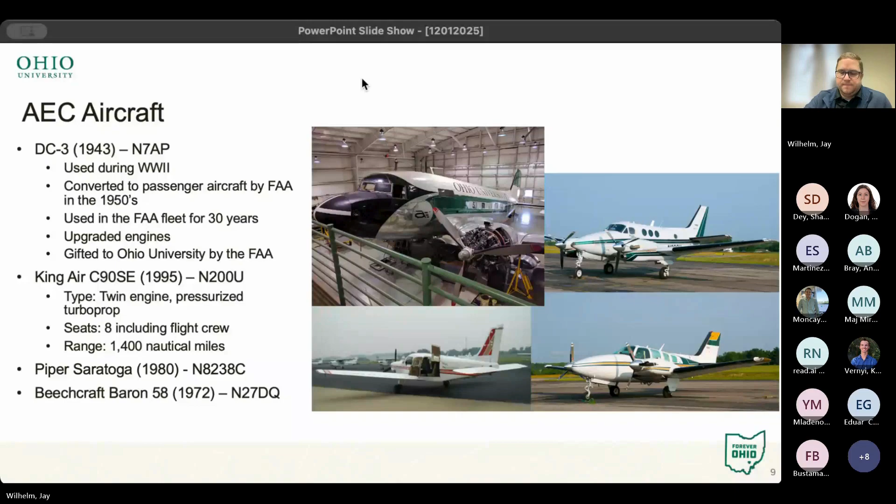Just a couple of good projects to try and boast about the center. That NASA project, I'll go into some detail about that in a minute.

I talked about the VOR DME program. There's a joint university program that's been sponsored by the FAA for 50 years now. It's in collaboration with MIT right now. There's only 2 universities, but Princeton used to be involved. I can't really point at another small university that has a 50-year-old program where we compete with MIT. So we're bumping heads with them with various different tasks that come down from that program to train graduate students.

So they have a really good time with that, and those students have won a lot of awards. The CubeSat went up in 2020. That was a good one to really look at GNSS data. There are receiver networks across the world, but now we have one on top of our engineering building that was receiving data just from that. And the PI on that, I think, is planning to do another payload.

Then there's a low altitude weather monitoring project that went on a couple years ago that was funded by the state. This was to make an inexpensive little weather monitoring box that could tell you cloud coverage, temperature, wind speeds, and a bunch of other things for less than 400 feet, specifically for drones and AAM.

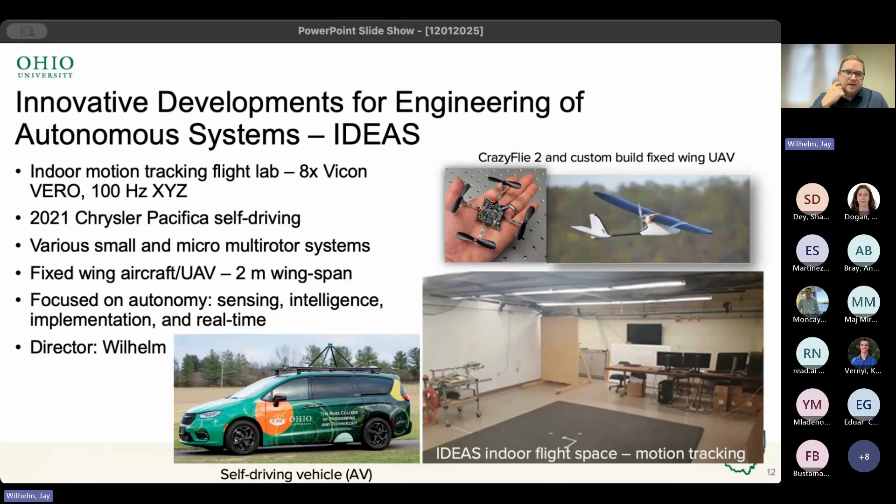We have, I think, 5 P100s and 2 P300s from JetCat. We're part of an Air Force project where every year they give us different requirements for a capstone experimental design process. The students have to do a bunch of research on how to do the modifications, what they need to design around, and then they modify the engine and test it. So far we've been taking it outside and running it.

So real quick, I talked about our automated driving project a little bit earlier. In 2019, I think we started collaborating with the Ohio DOT and the US DOT about what it would take to drive in Appalachia of Southeast Ohio. I pulled these three routes up right here, and they're a very hilly region. It's very up and down and very windy, and probably the most difficult place we could think to drive an autonomous vehicle. We think about big cities and people everywhere, but that has been nailed down pretty well.

Going to a rural environment is a little more challenging. So I used that self-driving van that I acquired to get moving on this project, and we brought in the Transportation Research Center as well. That's up in Marysville, Ohio, which is west of Columbus, and that's a test track that was made for Honda, and has since gone to a private company that they call TRC. So we did some controlled testing there, where we set up scenarios, and they had vehicles that they were driving, and then we brought it down to Southeast Ohio, and picked these three routes, had them mapped, and drove.

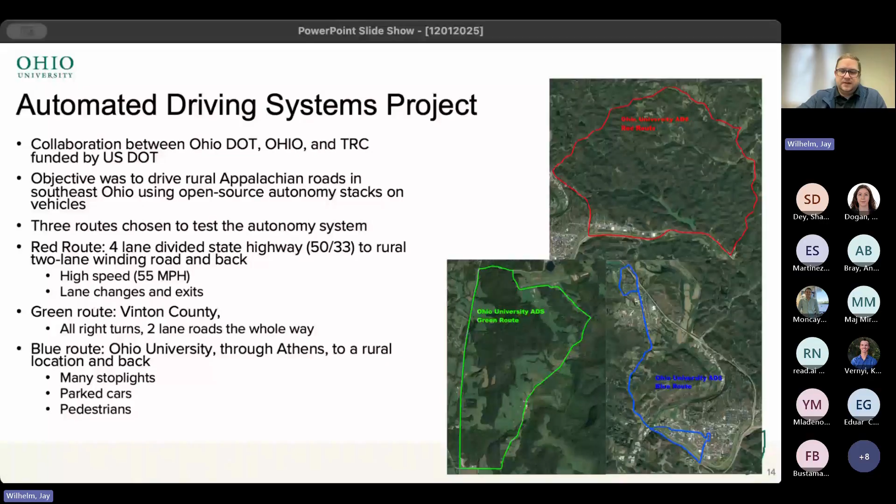So we can get 1 to 2 centimeters of accuracy, and we need that to make sure we're driving on the road correctly. For the most part, these systems use the GPS, not the line striping, to stay in the lane. You need to know where you are anyway, so they pushed it to work with GPS mainly.

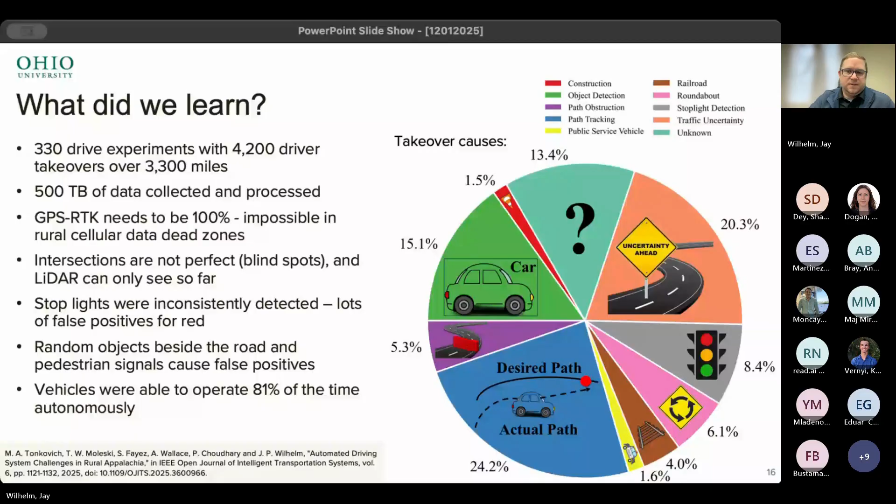So I'll move on now to what I call PRACAS. This is one of our collision avoidance algorithms that we came up with. I had a really good time with this one because most of the work was done in March and April of 2020. That's when our project was going on, and that's the time that was set aside to really make the developments and define the requirements for this.

But the world was kind of shut down during that time period, so I was able to do a lot of coding and dig pretty deep into this. There's not much else to do. So we were looking at how do you provide a collision avoidance system that takes over control of a fully autonomous UAS, with no pilot interaction whatsoever.

If you look back to manned systems, TCAS is required in all passenger aircraft over, I think, 20 passengers or something in the plane. This requires these airplanes to communicate with each other, to share their positions, and a tau value is calculated based on the trajectory of the aircraft, how long until a time to impact occurs. Then there's a heuristic set of rules: if the tau value is this, and the path is going a certain way, you need to climb, turn left, descend, or whatever. It's been very successful where aircraft actually have it fully installed. Lots of collisions have been avoided over the years.

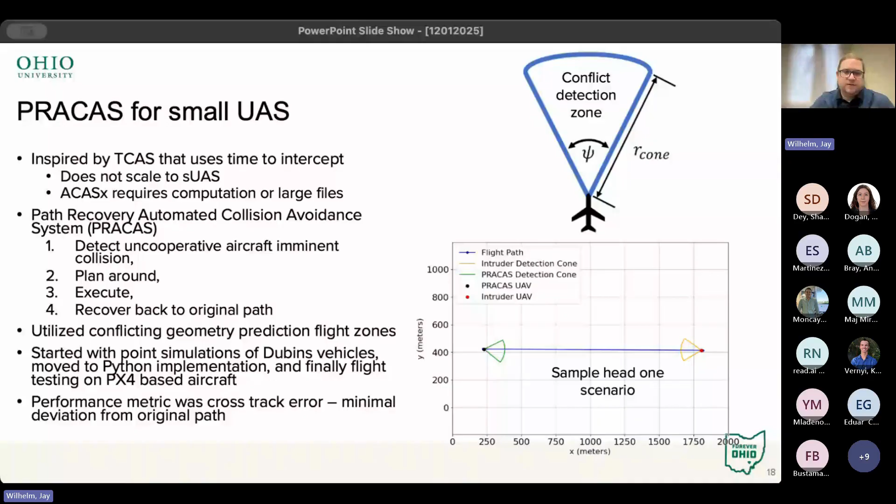They hit that point where those cones touch, and then our aircraft on the left does a plan around it. The plan part's fairly simple. In this case, there's no other keep out zones or things we can't touch. We take the geometry of the world and convert it to an A-star grid. The only keep out zone is that red triangle on the right. Each of those black dots is a possible place you can go in the grid to segment the waypoints a little bit. In this case, we are slightly higher in one direction than the other, and the system chooses to turn left to get away from that plane.

There's the impossible case where the planes are perfectly heading at each other, which sometimes produces a singularity and they don't go around, or randomness comes into play for which way you're going to turn. That never actually happens in reality—you never have two aircraft perfectly flying at each other. So we always offset them a teeny tiny bit.

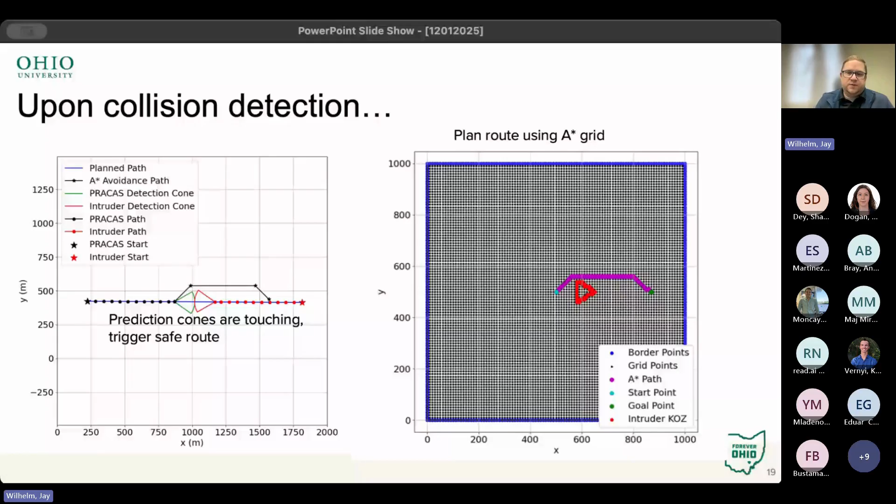So this is the first step or second step. First step detect, second step plan around. Then, once we're clear of the conflict—meaning our cones are no longer touching at all, or if we turn back to our original path we're not going to intercept that cone—we do the path recovery part. This is where I spent most of my time, trying to figure out the most efficient way to get back on our path.

I wanted to use clothoids so we could take into account the position we return to, but also be pointed in a very specific heading, which is along the path. So for sure, we could choose the shortest point and turn into the path, but that doesn't always guarantee that when we intercept the path we're pointing in the right direction. So clothoids work great with that.

The problem is clothoids don't always respect our turning radius capabilities. Sometimes it'll choose a path for us that we can't actually fly. So I went through a whole optimization process to iteratively search the space. That was really the challenging part of this.

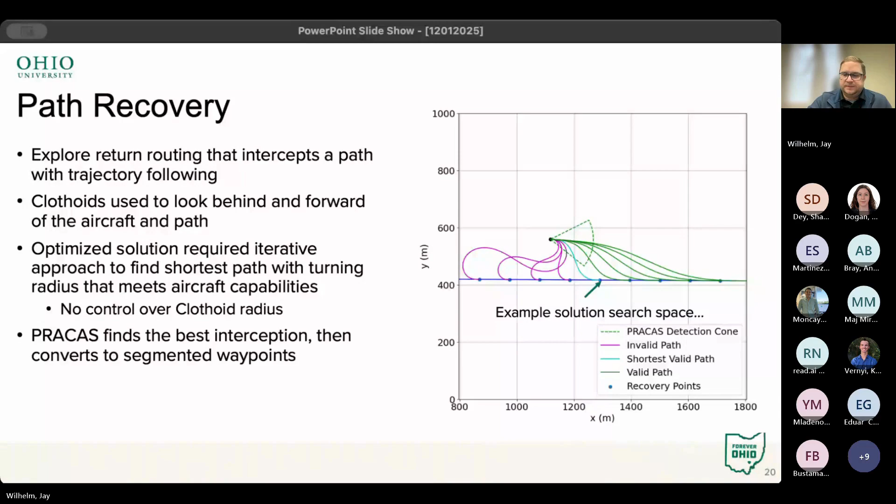Through that process, we were looking at the head-on case. Well, what happens if you're perpendicular? It turns out this works really great for, let's say, 60 degrees looking ahead. But if you get to the perpendicular case, which is the worst one, our method tended to turn in front of the aircraft. I don't think they were ever going to collide, but turning in front of someone is terrifying, and nobody would ever agree to do that. So we wanted to turn behind the aircraft instead.

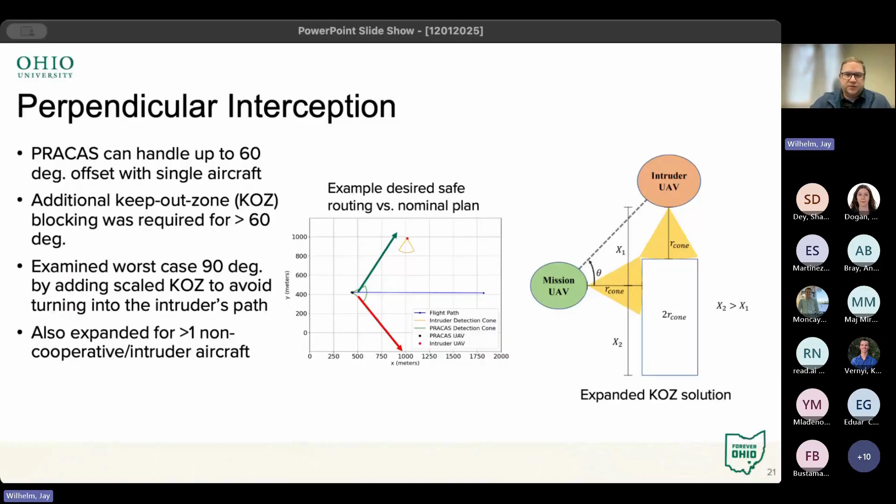So we looked at how to scale another keep out zone. When our cones touch, we basically extend the intruder uncooperative aircraft's cone down the path. So when A-Star plans, it's looking for the shortest path—it doesn't hit that cone, it goes around it. I had a student work through all the details of this and write a nice paper about it, but it was another situation for practice, just to make it better and more usable.

Here I got a nice video I created pretty early on of our system running. Say we wanted to run this racetrack pattern, and we've got these three systems in the way—it's going to automatically take over and turn back in. This aircraft had a pretty wide turning radius; that racetrack pattern is about the maximum turning radius it can do, or the best it can do. I think it intercepts these aircraft three or four times, just because you've got two going across your path, and one of them is really pesky and annoying, turning directly into you.

So I ran simulations like this for quite a while, in a bunch of different cases, to explore how well it works. Really, we're trying to measure the cross track error and the time spent off of the desired track. Because if you think about it, TCAS is only going to mess with your heading, whereas this one gets you back on your track as soon as possible.

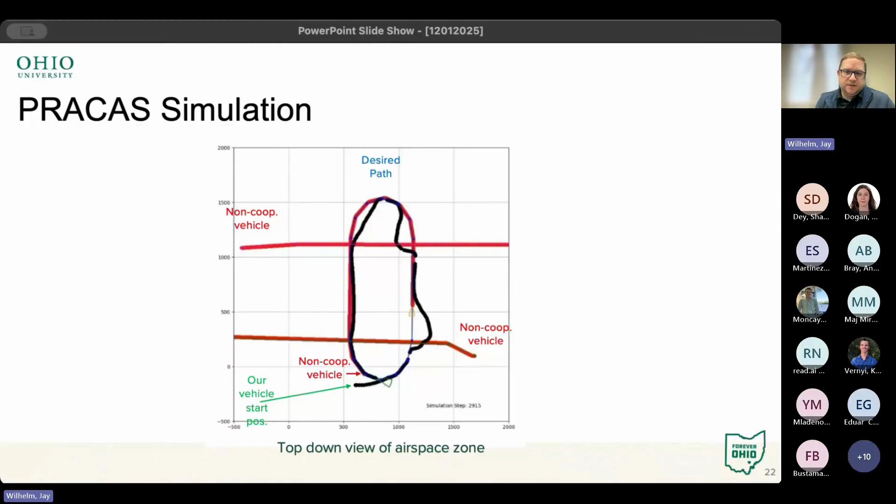So I think that's it. I have tons and tons of videos like that. After about a year and a half of doing development work and simulations, we took it out and flight tested it.

I was working with a company in Columbus that makes this autopilot. They call it Ironclad, which is based on PX4, and it's an embedded Linux system they call Ironclad because it's secure. By default, PX4 doesn't encrypt anything coming or going data-wise, so they needed more computation to be able to pull that off, plus some other safety things and verification on commands.

We were able to squeeze our software, written completely in Python, into a Docker container running on this tiny embedded computer system, and monitor an ADS-B feed of other vehicles. We had a connection to the PX4. They have a ground station, they upload the plan to the PX4, and start executing it. Our system runs in the background, able to take command of the PX4 and automatically upload the waypoints. They let me do this, which is bizarre. Then with no human intervention, it uploads the waypoints and tells it to start executing.

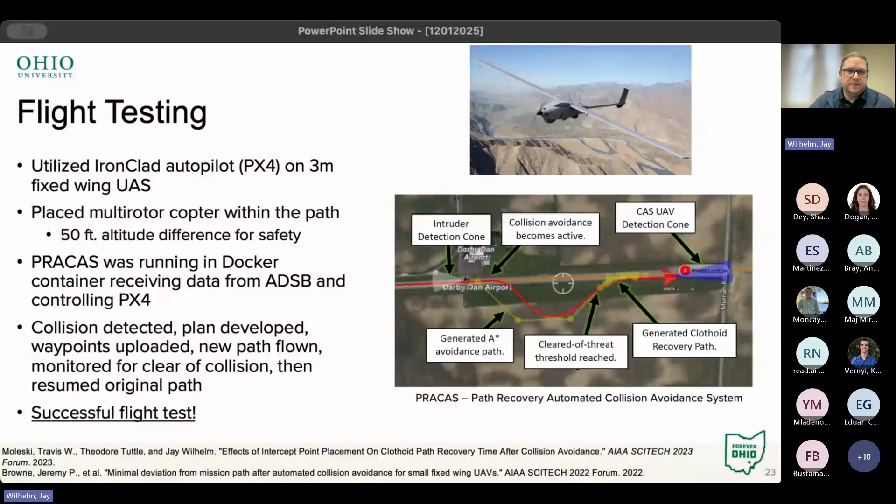Then a year and a half ago, we wrote a proposal for the NASA ULI, just like Dr. Moncayo did. We were working with a company called Reliable Robotics out of Mountain View. We have a contact who is one of our graduates, got an EE degree here, and was part of the Avionics Center. He's working on the positioning systems for their pilotless aircraft.

I show this Cessna Caravan here, a very strange picture. The engine's running, it's on the runway right there, but there's no people on board. They've done a bunch of flight tests where they've taken off, landed, flown in between, of course with no pilot or any human interaction.

It's completely autonomous. But they came to us with a problem of ground navigation precision and trust of your position calculation on the ground. It turns out that maybe the ground is not the most reliable positioning system for aircraft. Once you get up in the air, it's perfectly fine. So they had a problem where they were not trusting their GPS feeds enough to navigate the taxiways. Right now, somebody has to manually use a control thing to move that aircraft to the actual runway. Once it's on the runway, it's great. In the air, it's great. Landing's great. But then they need somebody to take over and taxi it back. So they thought this is the next logical step of where to go.

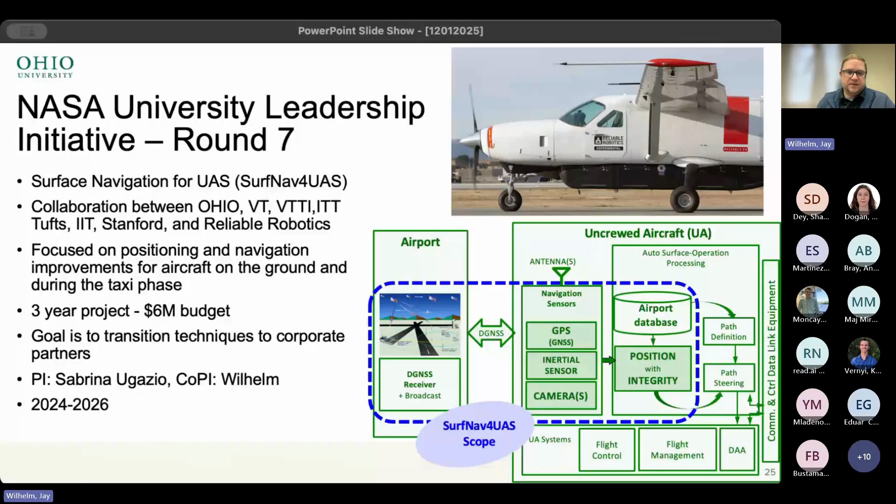I'm not the PI on it, luckily—that's a lot of management stuff involved. But my colleague Sabrina here is, and we're working with Virginia Tech Transportation Institute, Illinois Institute of Technology, Tufts, Stanford, and of course Reliable Robotics is in there.

So we do some work with computer vision, building out a way of looking at features, or contrasts of the image feed, and evaluating which of those detected features are real, should be used, should not be used. Then we look at each subsequent frame and the vectors between them, and we can get odometry based on that. It will give us an incremental position calculation. These are very mature algorithms that mostly work, but they don't always provide us information about how much you can trust the solution.

Even I'm guilty of this, of developing these systems, focusing a lot on how accurate it was, but not how trustworthy it can be. Those two things don't necessarily go hand in hand.

So we're popping the lid open on some CV systems and looking at extracting data from their processes to look at trust. Then we mess with the images—we make parts of them blurry, and purposely obstruct things to try and mess with that feature detection.

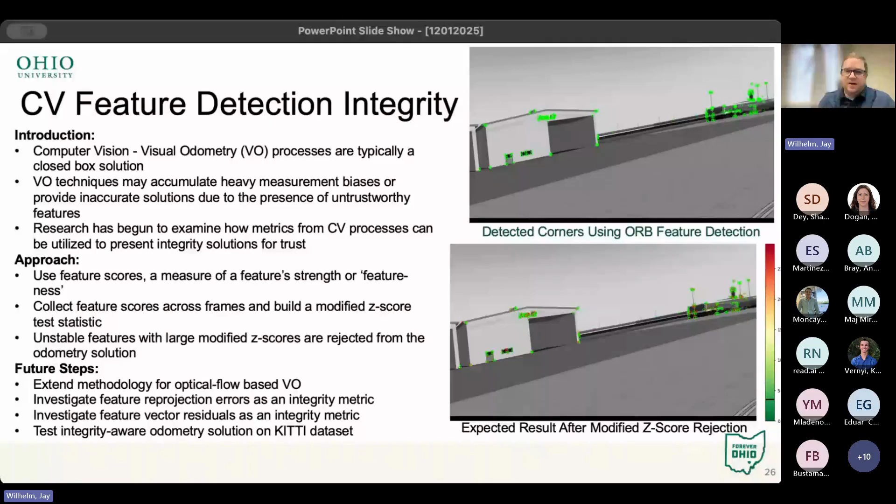So that's one of the parts of the ULI. The other one is this camera plus LiDAR hybrid localization. About 5 years ago...

We're messing with LiDAR systems. We have cameras everywhere, but we're using them separately, and so I wanted to combine them for a single localization solution. So what we did was place a bunch of landmarks in a room, and we know their position using my motion capture system—I can use that for truth reference. But we identify those landmarks visually using a camera, then we range to them with the LiDAR, and correlate the two together. Then, using the known landmark locations, I can use trilateration to find my location.

This is sort of similar to how GPS works. GPS is really using what's called multilateration, which is range to the satellites that's modified based on the atmosphere and relativity. The receivers know where the satellites are, but they're trying to calculate where you are, and it's really the intersection of a bunch of spheres. So we use a numerical solver to do that, and we do that with trilateration as well.

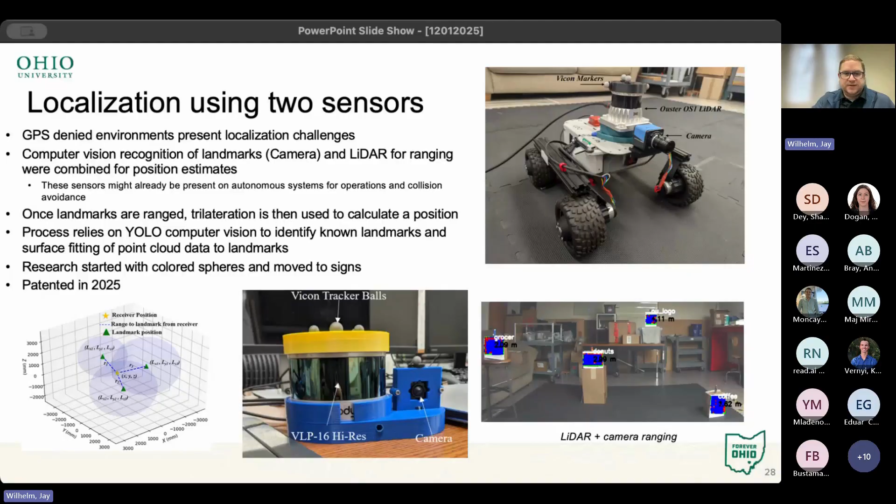I thought it was unique in the internal processes we were using, so we put forth an invention disclosure and just got the patent this year. So that, to me, that's a good thing. And of course, there's a bunch of papers, and I've got the references at the end of this.

But how we started was simulating it in a program called AirSim that Microsoft makes. It's basically like a simulation environment for engineers that sits on top of the Unreal Engine, so we can move stuff around, know the positions of things, change stuff, and work with things like meters instead of whatever the heck Unreal uses for their distances.

There's gravity involved and all this cool stuff in there, but we're able to simulate a LiDAR real easy. So we placed our landmarks as colored spheres and fed the camera view into our system, combined the LiDAR data with that, because we calibrate our cameras. We have a projection matrix, and then do our calculations. So we're like, if we're looking forward, can we see these things, and then figure out where we are? And it worked, and it gave us centimeter level error.

And then we built it with an actual camera and a LiDAR. We tagged everything with the motion capture system, so we know exactly where it is. We used color spheres because that was a super simple computer vision process to categorize it by color.

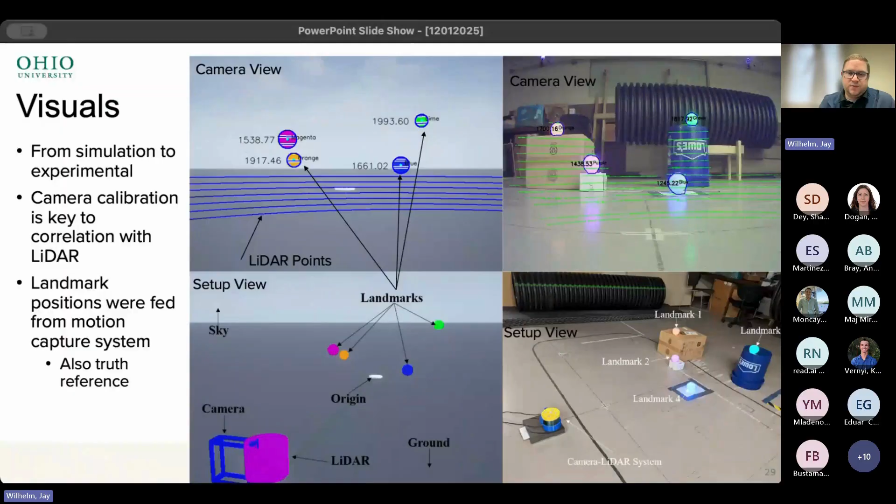It turns out that we're looking at this thing with spheres. Our LiDAR points have a couple scan lines across them, so we matched what our known landmark shape was. A sphere, look at it from any angle, it's going to be the same. We match that to the LiDAR to figure out where the center was, because the center is where the landmark position is going to be. Our accuracy stuck quite well to 1 to 2 centimeters when we did that.

And then we started upgrading and moving along. So the Ouster OS1 has 128 lasers. We started this with 16 lasers and moved to 128. It's a lot of data.

We also looked at YOLO for recognizing the landmarks by, say, a sign, like we've got a grocer here and the university logo and some other things, and that makes them unique. So we train on images in YOLO, identify them visually, and then range to them. We know that they're flat, so we match the LiDAR to that, and from that we can figure out our position. Again, we get about the same accuracy, but completely changing what the landmarks look like.

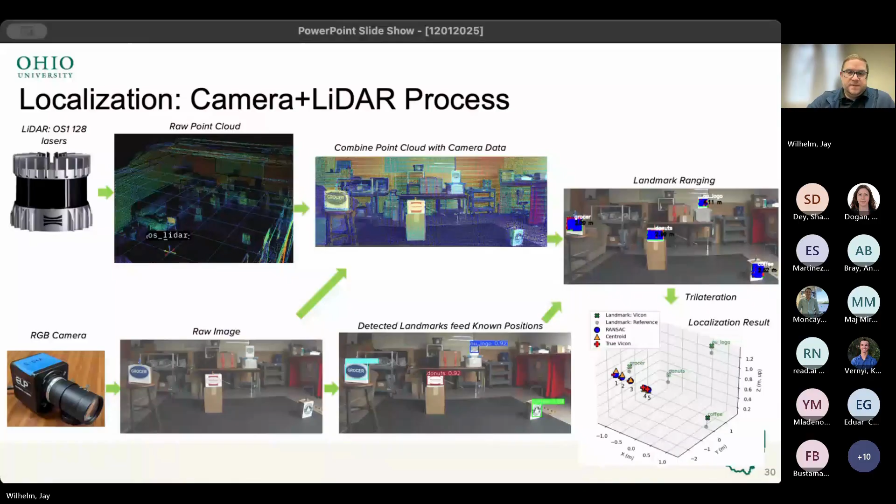To fit this into that NASA project, we started looking at what are the markers inside our algorithm. It turns out that the distances and the variance we detect on the surface of the landmarks can be used to indicate what's going on. There's also a technique called RANSAC that's used for GPS, looking at ranging consistency. Over time, we're able to measure that. So we have these features now that we can bubble up to the surface to say, hey, this is how we can have confidence in our solution.

So say we mess with things, like you can only detect a part of the image, or our range is all over the place, or for whatever reason we get interference from the laser. We want to have a confidence measure of what our solution is generating. So of course, go back to the typical engineer: just make it work well. Okay, why isn't it working? How much can we trust this? That's what we've been working on in this NASA project.

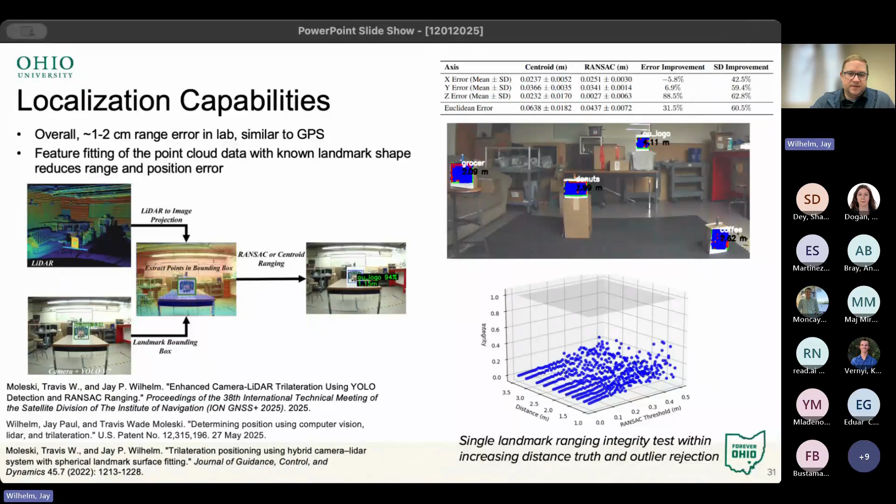We've got a couple papers on various techniques we're working with, like the computer vision side, and one that will be at SciTech. We also go to the Institute of Navigation and talk about these things, at a conference called GNSS Plus.